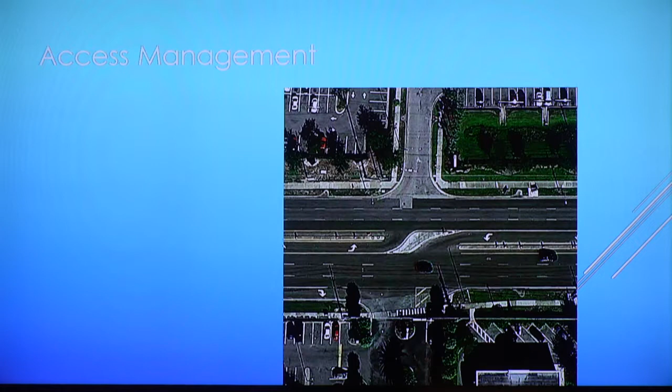I'm the Traffic Engineering Supervisor here in District 2. I'm here to make a brief presentation on access management. I'm hoping this is the clicker. All right. First, I'm going to kind of give you a background on access management, how we've got to where we are, and then I'm going to show you how it kind of applies also with Pyramid Highway, which is a project we have coming up that's privately funded, but it's going to employ some of these elements of access management into the design in the future.

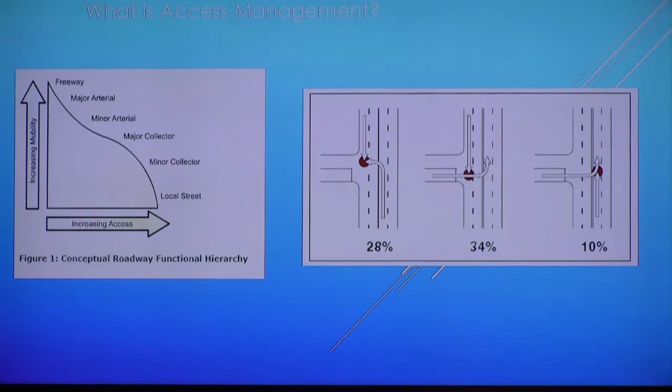So access management, basically, is the control of access on highways depending on classification and types. And some of the basic information that we provide is that higher mobility, i.e. higher speeds, freeways and stuff like that, more connective, has the most restrictive access, going down all the way to local streets where there's relatively none.

Some of the major things that we're targeted with as far as trying to help improve safety is eliminating the more serious damaging crashes. In today's age, it's better to have property damage versus injury or fatalities. It's a goal that we're trying to reach, to zero fatalities as far as the state of Nevada.

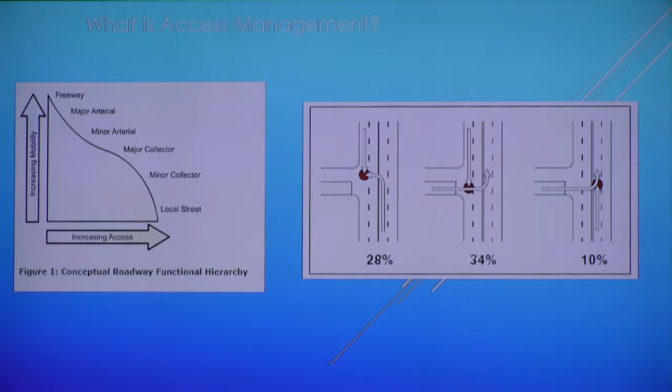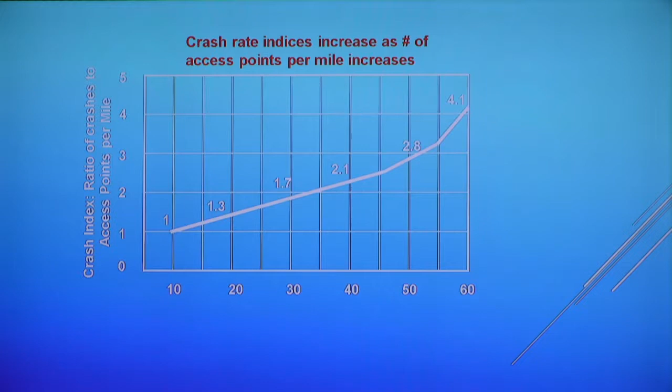And with most of the intersections you see, a large percentage are contributable to left-hand maneuvers coming out of the cross street. You have a 28% associated with lefts coming in, but then almost a combined 44% of accidents of all the total around the country, on average. In addition to that, there's also proven studies throughout the nation that as the access points increase per mile, the crash rates go up also.

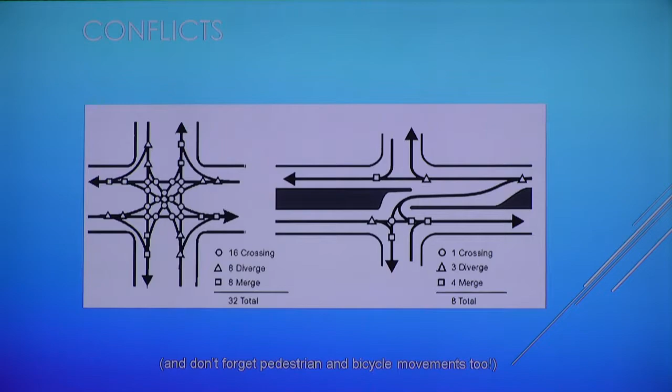Here's an illustration: on the left, you can see that at a full-blown intersection, there's 32 potential conflicts. On the right, if you have an access control or limit your movements, it reduces it down to 8. And it simply boils down to the fact that as individuals, we can only process so much information at a time. So the less you have to look at and process, the better things go for drivers. There's a lot of mitigation we look at, access spacing.

Of course, a perfect example, tightly spaced signals. A good example, unfortunately, McCarran at I-80 on the east side here, from basically Nugget all the way up to Lincoln. There's like 5 signals in there. The progressive movement's horrible through there. So we really want to try to space out traffic signals at about a half-mile spacing. In tight urban situations, maybe down to a quarter. Same thing with driveways. The further apart, the better.

Turning lanes: dedicated left and right turning lanes are shown in national studies to reduce crashes up to 60%. Indirect left turns, U-turns, which we're starting to employ in roundabouts, they keep traffic flowing. U-turns as mid-block alternatives relieve traffic signals. If you're going through tight access control, you can allow people to make mid-block maneuvers just to safely U-turn.

Median treatments, two-way left turns, they are good up to a certain point, but mostly on lower speeds. In a lot of other jurisdictions around the country, they don't use two-way left turn lanes on roads with speed limits over 45 miles an hour, and in some states even less. Then also, one of the best forms is a non-traversable median. That's been shown to reduce accidents in intersections or along highways up to about 16 to 20%.

Last thing is right-of-way, which we always have to work on, but it's sight distance. Lots of times you pull up to intersections and you have to pull way beyond the stop bar to just see out, so we're also trying to work on that. You can see some of the relationships.

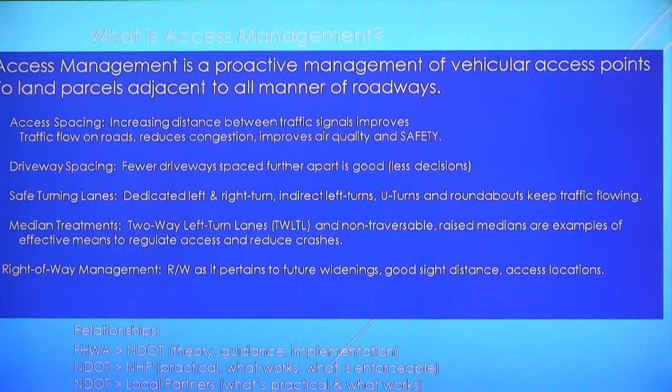And then again, why I'm here tonight is working with our local partners, Washoe County, City of Sparks, City of Reno, to try to see what's going to work and try to be the most affordable and balanced access and also increase safety.

We just updated our access management standards in 2017, and we've kind of set up a process, it's pretty cookbookish. We can go to a facility, we can determine what type of access is there, and we can employ an appropriate strategy. But I want to emphasize that we're not just simplifying, it's based on a lot of national research that we've looked at and digested over the years from the federal government and other states.

Again, the relationship with speed and access: of course, when you're on the interstate, the higher speeds, 50 to 80 miles an hour, least amount of access. Interchanges, very controlled. As you come down, arterials are usually in the range of 25 to about 50 miles an hour. And then you get down to the lower speed streets, 20 to 35 miles an hour, where you really need little to no access control.

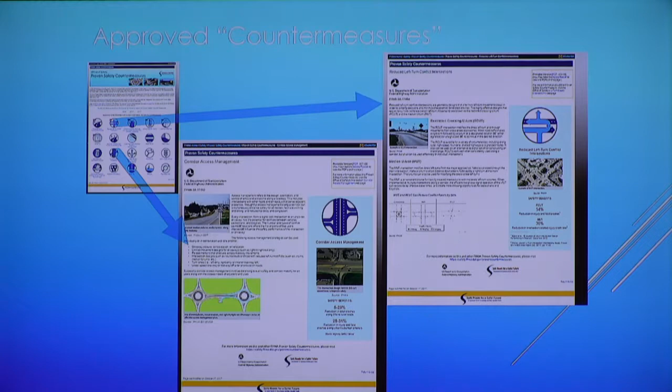And speaking, like I said, of federal research, these are some of the pages that we refer to as proven countermeasures that the FHWA, through their research, have said these are the things that have worked and have done the best in reducing crashes. Some of them you can see, roundabouts, of course, but then you'll notice a mid-block where it's a right in, right out, and basically you circulate around the roundabout and make a U-turn.

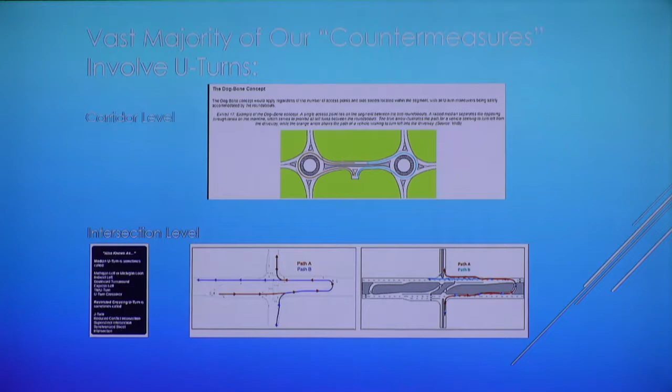The other two at the bottom are a Michigan left, and another called an R-cut, where you have direct and indirect left turns at the intersection, but then you allow the people coming out to make U-turns further down the road. Some of the more advanced things, you've noticed the diverging diamonds, where you cross over and reduce the left turn conflicts, and then they even have what we call displaced left turn intersections, where you actually cross over the road in contraflow against traffic in the intersection, but it allows you to make a turn, again, with less conflicts at the intersection.

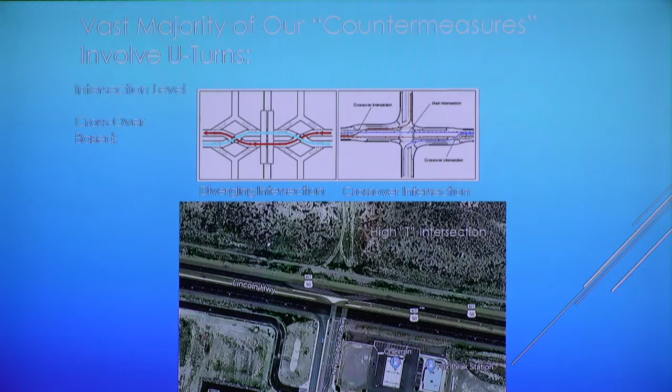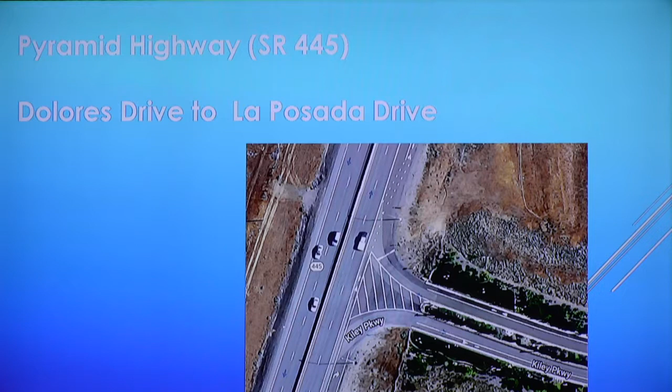One of the other ones we employ a lot right now is a high T, but most of those are usually reserved for higher speed roadways. And then, again, it's just an illustration of some of the U-turn based solutions. And now I'm going to take this and relate it to what we've got going on Pyramid Highway. So first I want to give you a little bit of background.

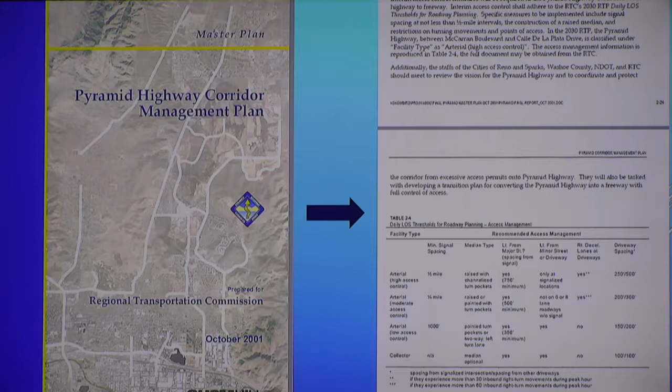This is a cover from the October 2001 Pyramid Highway Corridor Management Plan that was done by the RTC. As you can see, and I don't know if I can point, the table right here, that was back in 2001, the initial access management recommendations, but they did have access management recommendations for the roadway. And they realized back then that they had to have control of access.

If you look at our most current table, here's an updated version of it, and these are the standards that apply basically to Pyramid Highway. They're very similar, but they've just been refined based on what we've seen that works in other states.

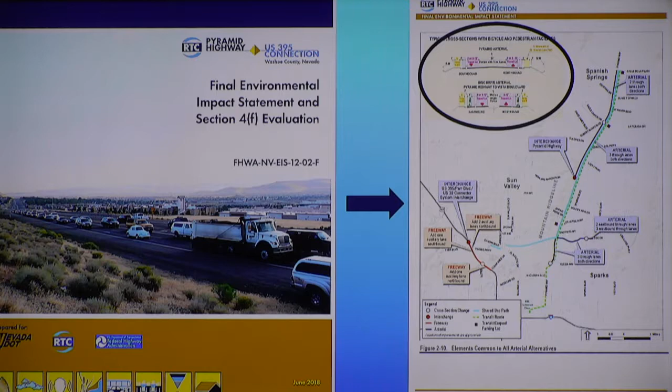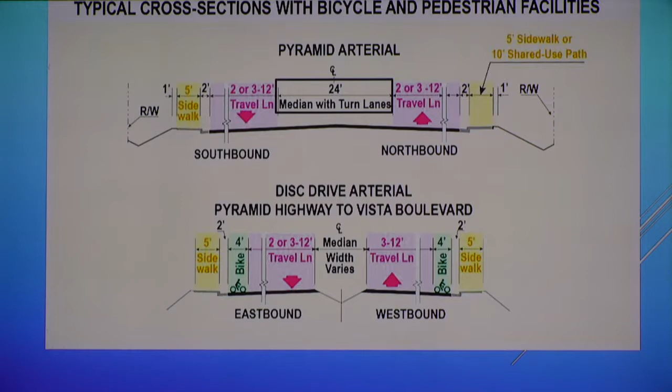So now if you fast forward to 2018, the RTC has just updated their Pyramid Highway EIS, and I believe they have it signed off. It's either the draft ROD is being signed or the ROD has been signed. I'm not 100% sure, but this is basically the final document, and it's basically changed Pyramid Highway from Sparks all the way up to north of La Posada into a 4 or 6 lane highway with a 24-foot median with turn lanes to be incorporated in it.

I killed myself. How do I go back? Safety. Please save me. Thank you.

Let me get back to the right slide. Sorry about that. Sometimes I get overzealous with the clicker.

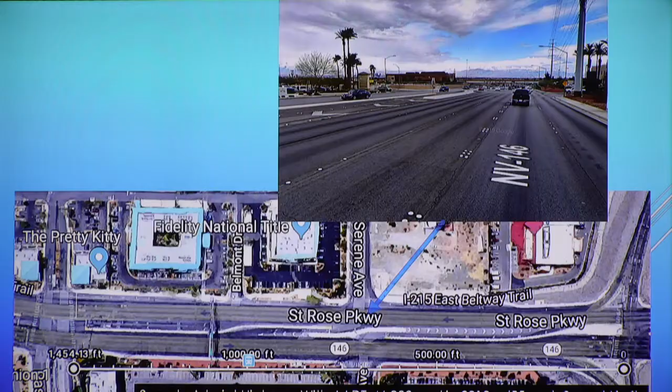So there's two concepts presented here, and the first one is the original RTC concept, which still holds true to the values and the recommendations that were in the previous set of recommendations I showed you for the study, where it's basically a signal at Dolores, a solid median all the way up to La Posada. Eagle Canyon is off to the right with a solid median. Now, it's a good concept, except it does put a lot of pressure on the two intersections to be able to handle the U-turns that are going through. The concept on the bottom is a proposed development that is going in the city of Sparks.

Oh, I did it again, or did I? Sorry. I'm on the last slide, and I will put my finger down and not touch it anymore.

Okay, sorry, there. The bottom one is proposed private, where it meets our current access management standards. It allows for basically two left in, right out, or not full access, but partial access driveways. The one to the extreme right is the entrance to, I believe, the tribal smoke shop. Then the second is David James, and then I'm bad on names. The one in between Dolores and David James is, I'm having a brain melt. Does anybody remember? I will point but not push.

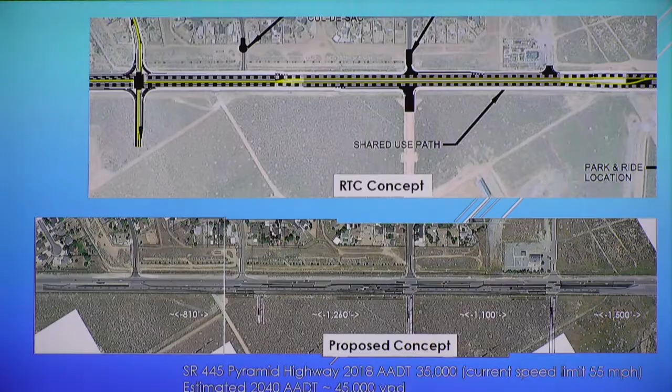And Madam Chair, just as a reminder, the agenda item is for the presentation, so you are free to ask clarifying questions, but not to have any deliberations, and there's no action styled on it. Right. So before I open it up, is there any public comment on this? No, there is not. The agenda does not provide for public comment on this item. Okay, thank you. So I'm just going to start and go this way. Commissioner Lawson, do you have questions?

I do, Madam Chair, thank you. First, I'd like to say, OJ, really, really nice presentation, except for the operation of the slides. I apologize.

So this is an access management plan for the northern portion of the corridor, correct? Yes, sir. The volumes, the 2040 AADTs, are projected from the travel demand model? Yes, sir. I took those out of the EIS that they have in the travel demand model. Okay. As part of that travel demand model, I'm not sure what type of developments are included in that model. Are you aware of that, or does Lacey know, or were you even involved in that, Lacey?

Okay. No, I mean, it's not an exact representation, because it's a guesstimate anyway as far as the 2040, but it should contain at least a fair proportion of, I believe, most of the development that's going on in the area, because this is a hot corridor. It is. Is it safe to say, would you agree, OJ, or not, that one of the things that's most problematic about doing access management is the evolution of development that you hadn't considered?

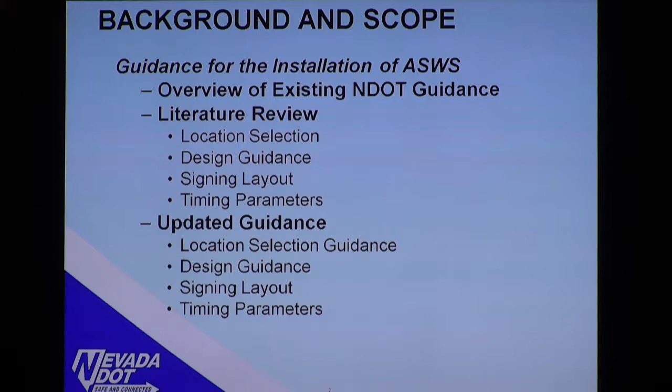So as part of this, they are going to do a couple of things. I think one of the reasons why OJ wants us to bring this is that Pyramid is one of the intersections that we know everybody up north here is very interested in. We have a lot of advanced signal warning systems on Pyramid.

And once Pyramid Highway, once we get the guidelines in place, the consultant has the first task to use the same guidelines to examine all the advanced signal warning systems we have on Pyramid and give us recommendations as to which ones we want to still keep. Do we want to modify them? Currently, all of them are active systems.

What we mean by active system is simple, that once the signal is about to change to yellow, or when it changes to yellow, then the advanced signal warning system begins to flash. So it notifies drivers that there is something going on, so begin to slow down. Some states do the passive, where we have the warning systems on all the time, so they don't have to be triggered when the yellow is about to start.

So that is one of the assignments that the consultant has. They have to tell us, when do we want to install the active, when do we want to install the passive, or when do we want to install the static, where it's just a sign and it stays there for driver's information.

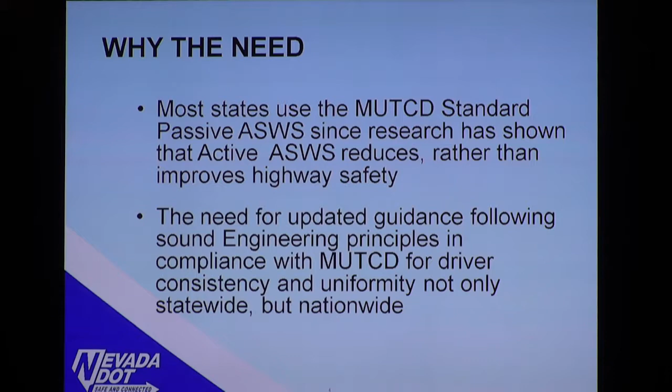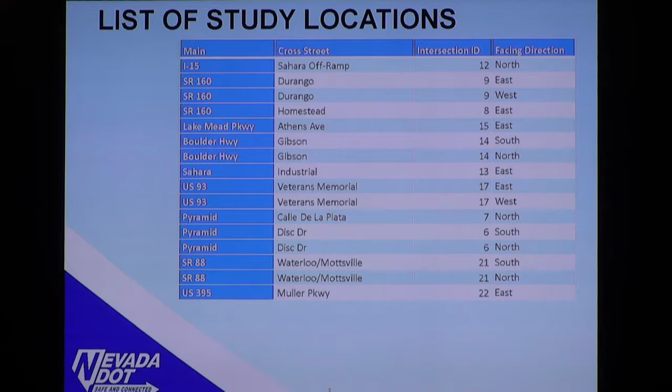This is a list of all the advanced signal warning systems we have. Actually, when they went to the field, I think they found one or two that were not captured. That is, some of the counties are trying to install. So we have quite a bit, mostly up here, Las Vegas, and a couple of them in our District 2. So they are going to study all these intersections and then come up with a recommendation as to whether we are going to change from active to passive or take it out completely.

So you will notice on Pyramid, after their study, some of the advanced signal warning systems would change. I would want to say it that way. They most likely would be taken out, those in between the first and the last. So currently we have one at almost all the intersections. We are going to reduce them and then keep just a couple of them on Pyramid.

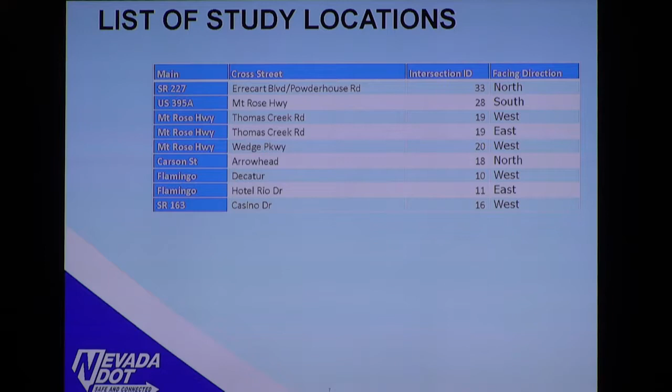So when the time comes, we have a procedure. They are going to develop a procedure for us to follow in taking out the signals, including covering the signal heads for a number of days before we take them down, and making sure that we will do a before study and do an after study to be sure that taking down the advanced warning system is better for the system or otherwise. So we have to make sure that we follow their recommendation and do a before and after study, just to be sure.

This is the schedule they have. Right now, they've already started work. We gave them the notice to proceed in May. They're already doing literature review. They are in the field collecting data, and they're in the process of updating the guidance. Once they are done, then they will start going into the nitty-gritty of telling us which advanced signals we need to take out or modify.

I already mentioned the three types of systems we have: the active system, the passive, and then the static. You will probably notice that all the ones we have are active, except for the new one that we installed at Calle de la Plata, which is a passive system, so it's always on. And we did that for one reason, which is we are trying to see how the passive is perceived by the general public, whether they are reacting in a negative way or a positive way. So far, so good. We've not had any crashes. It's also a new signal, so it's been received very well. We've not had too many public complaints, so we are happy for now.

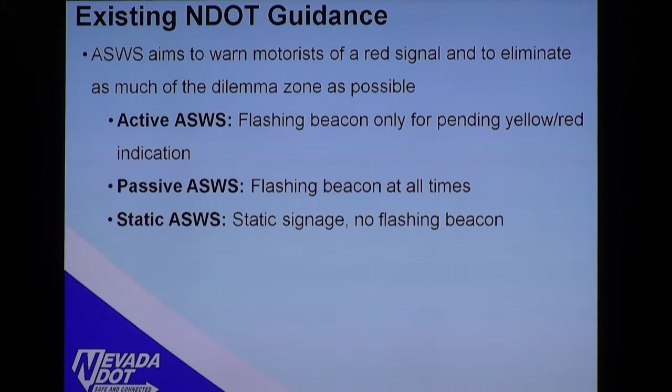This is the old NDOT guidance that we had. It was basically telling us that when we have an isolated signalized intersection, or the first intersection in a series of intersections with signals, then we want to put in an advanced signal warning. When we are in a curve where visibility is poor, we typically would want to put in an advanced signal warning system. And we had a set of equations and the table to guide us in doing that.

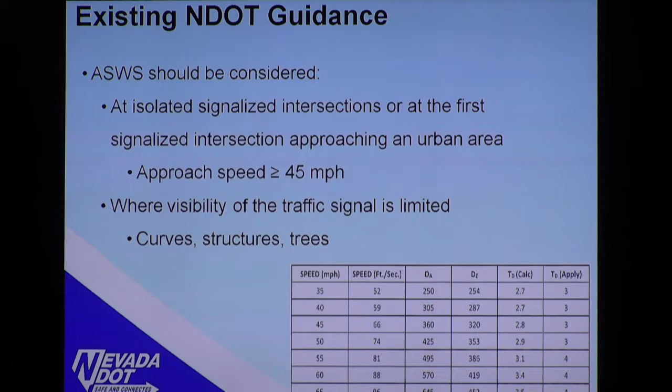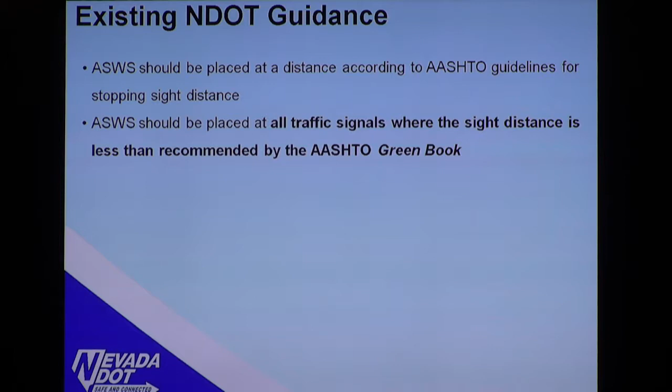But HDR is now going to give us a more comprehensive system, which we would apply to the whole state. Let me put it that way. So our existing guidelines follow the AASHTO. We made sure that we had enough sight distance for drivers to be able to stop. If we didn't have a good sight distance, we introduced the advanced signal warning system.

So far, they've done a couple of literature reviews looking at Minnesota and Utah, and we are not too far away. Basically, most of the things that they considered in placing the advanced signal warning systems, we were doing that. Isolated or unexpected signal intersections, limited sight distance, we considered the dilemma zone, giving the drivers enough time to stop, intersections that had too many crashes, and then we used our engineering judgment for some of them.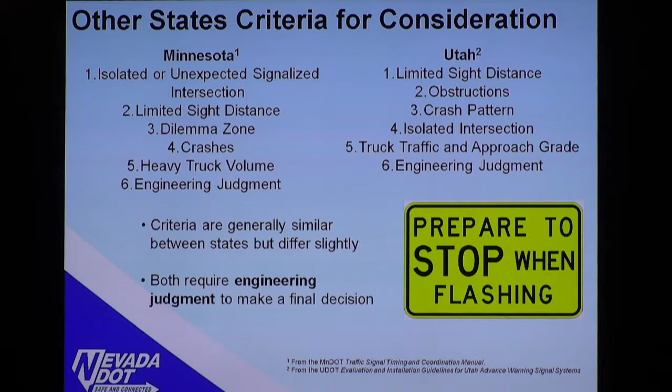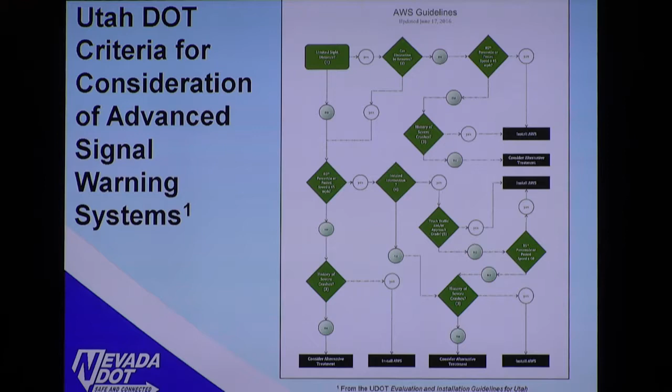Utah follows one of these charts to place the advanced signal warning system. We are not sure whether we are going to follow the chart or Lacey and her team will develop something better. We know it's going to be better than whatever is out there because they are going to build on whatever others have already developed.

That's the end of our presentation for now. They've gone very far. We've had one meeting already with them. And we expect that in the next 2 months, we'll have our guidelines, which all the counties and all the districts would be using as a standard for the whole state. Thank you. If you have any questions for me.

So I'll start this way. Commissioner Bruce? Well, I drive Pyramid most days of the week. And I turn at Calle de la Plata on the Pyramid. I'm not sure about the continuously flashing. It doesn't bother me because I'm turning right onto Calle at that point. But I have had some neighbors comment that it throws them. Now, that may be what you want to do because a lot of times when people get thrown, they take their foot off the accelerator rather than pushing down.

And my issue, I like the pre-warning, the pre-flashing, the active. I don't like sometimes the timing, because there's a couple, and I believe the one there at Los Altos, that you can pass the warning light and still it'll be changing when you just get to the intersection. The timing, it needs to start flashing maybe 1 second earlier.

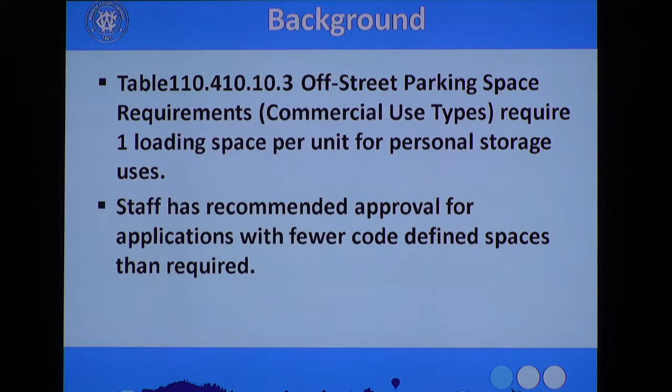Currently, Table 110.410.10.3 has a requirement for personal storage uses, 1 loading space per unit. So if you have 30, you have to have 30 loading spaces on the property. Seems it's pretty extraneous. So staff has recommended approval for applications in the past with fewer code-defined spaces than required based on that realization that this is a little bit extra. So this request is an initiation and a request to amend the development code in Table 110.410.10.3, off-street parking space requirements. The proposed update to Table 110.410.10.3 will decrease this required loading space for personal storage. All right.

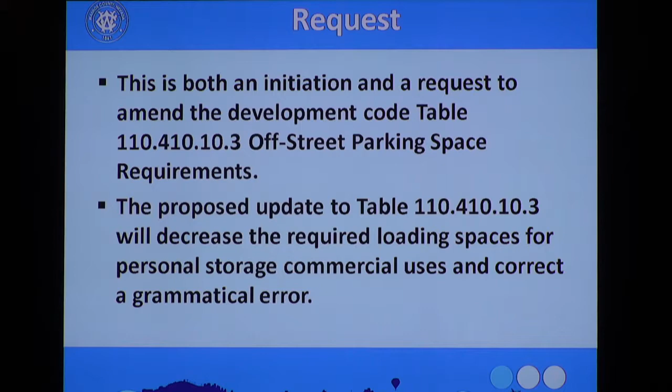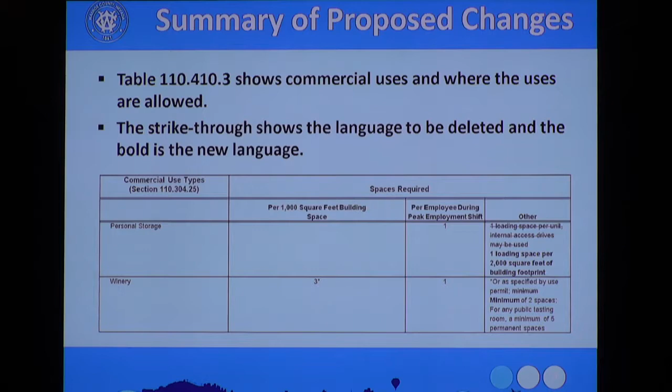So this is a look at the table. I should also mention in the winery section, there is a grammatical error as well. There was a lowercase at the beginning of a new sentence that we had to capitalize. You can see it down there starting with minimum. Actually the correction's in the 3rd line for the winery. But the main purpose of this DCA is the personal storage loading spaces. Again, it started with 1 loading space per unit. We're requesting to amend it to 1 per 2,000 square foot of building footprint. That would alleviate the footprint, kind of condense it, give us a little more space for developers.

We held an open house, all CAB members and public invited. There was only 1 attendee from Truckee Meadows Fire. No one had any comment at the open house. I did receive 1 emailed comment. It wasn't exactly clear, but they understood it as we were getting rid of the parking space requirement. They thought it would be wise to keep parking space requirement, not necessarily that the number of required spaces was needed. We also noticed in the Reno Gazette-Journal for this hearing.

Here are the code amendment findings. There's the 4. We were able to make all 4 required findings. And then I have a possible motion, and I'm available for any comments. This is a public hearing item. Do we have any public comment? No public comment. Okay. Then I'll bring it back to the board for questions. Any commission questions? Seems very logical.

Madam Chair, Commissioner Chesney. I'd like to make an initiation and a motion. Okay. I move that after giving reasoned consideration to the information contained in the staff report and received during the public hearing, Washoe County Planning Commission initiate the amendment to the Washoe County Code Chapter 110, Article 410, parking and loading as described in the staff report WDCA 19-0003. Do I need to read the amendment?